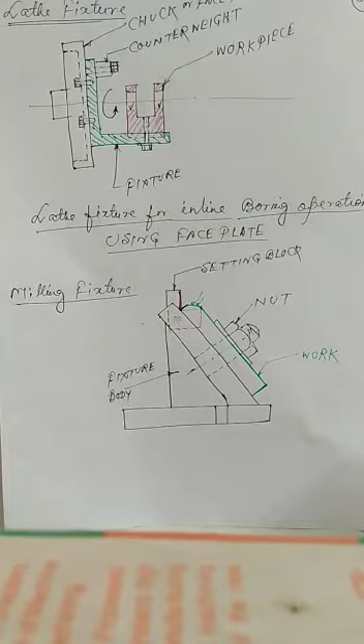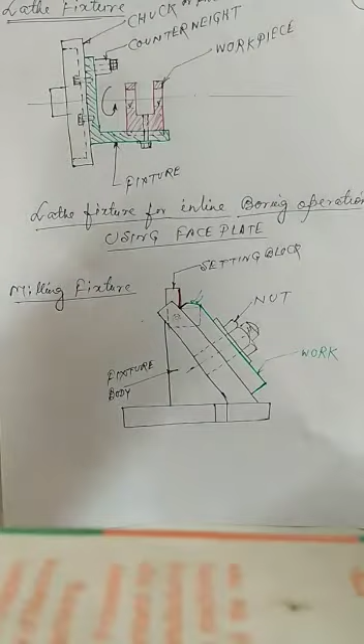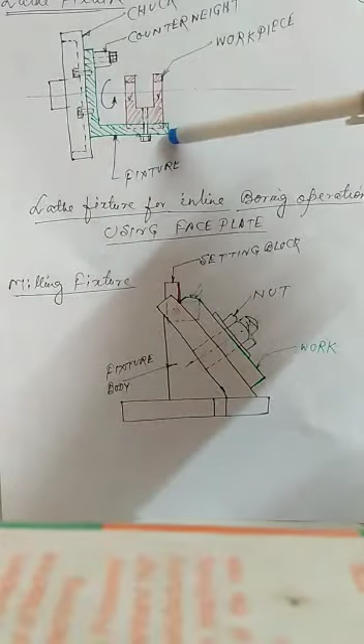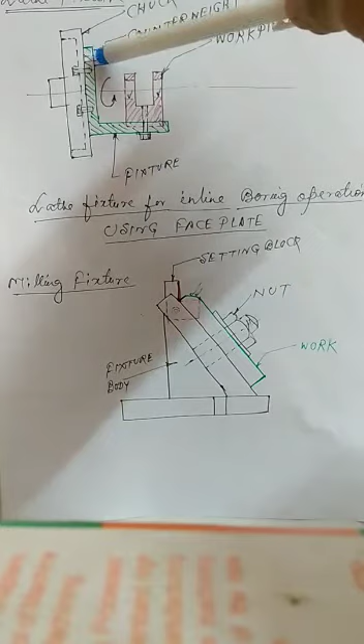First I am showing you a lathe fixture. This is a lathe machine's chuck held in the headstock, and the job is placed in the center of this chuck, this workpiece, this red portion, fixed on this fixture. This is called fixtures. This right angle portion, the green portion, is the fixture. On the fixture we are clamping this job, and the axis should be concentric with this chuck, and there is a counterweight placed to keep the balance of this fixture.

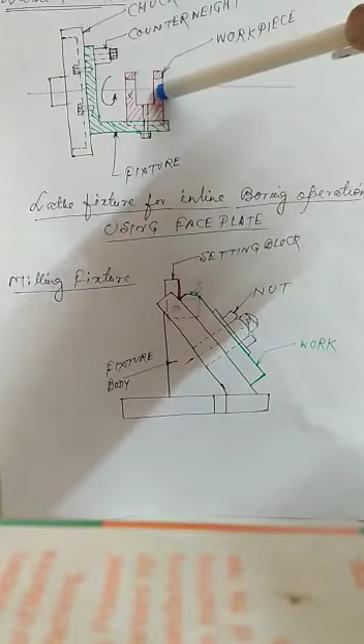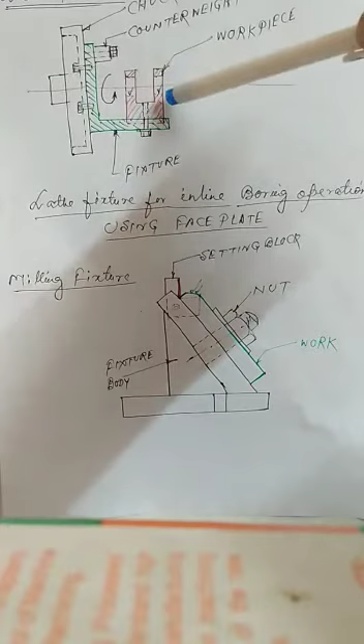So it will rotate in this fashion, and this workpiece, here in the center, there will be a boring operation in this middle portion. So whenever we are making a boring operation of a job like that, we will have to fix this job in a fixture in this fashion. So it is a practical lathe fixture for boring operation by using the faceplate.

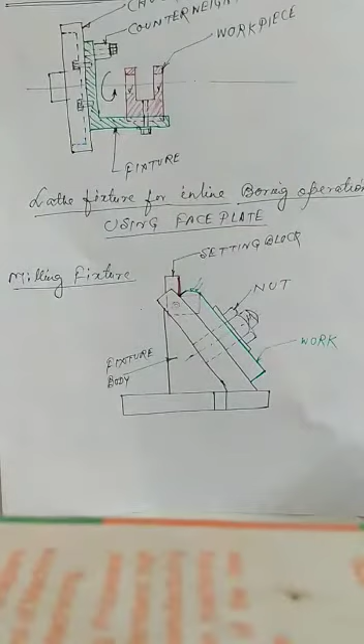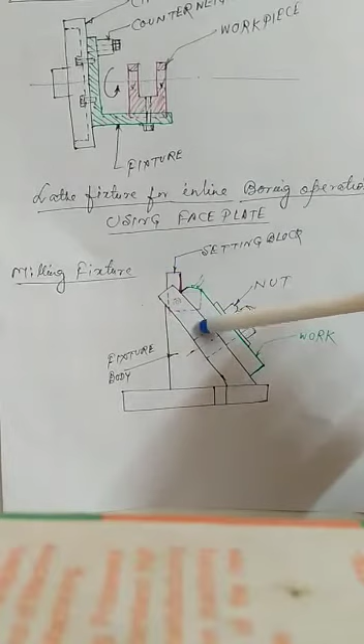Next is a milling fixture. In this milling fixture, we observe this work, this green portion, bolted by this nut, and this is a fixture body. This can be tilted at any angle. This is a milling fixture, and it is a setting block here. By tilting properly, we can set it by the set screw, and we have to make a milling operation here, this angular operation. So this is a milling fixture, a very simple milling fixture.

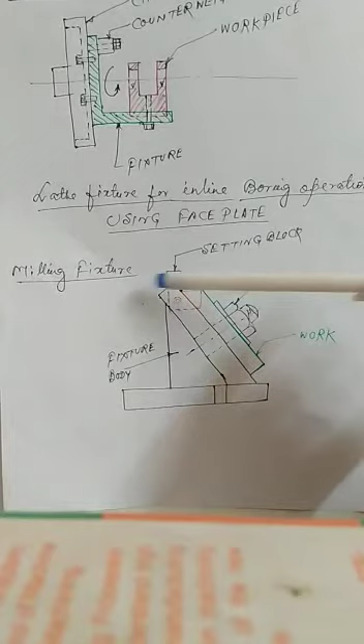Okay, there is another picture we can show you.

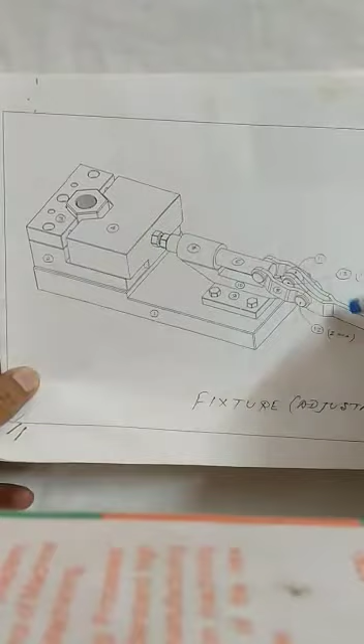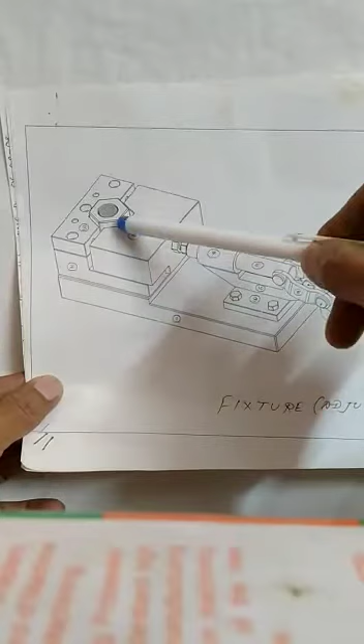This is a fixture with a clamping arrangement. This is the fixed side of this fixture, and this is the movable side. We give pressure here by this handle, on the movable side, this jaw. This is the fixed jaw and this is the movable jaw. It will be tightened on this job, and this job will have operation in the center. So this is an adjustable fixture.

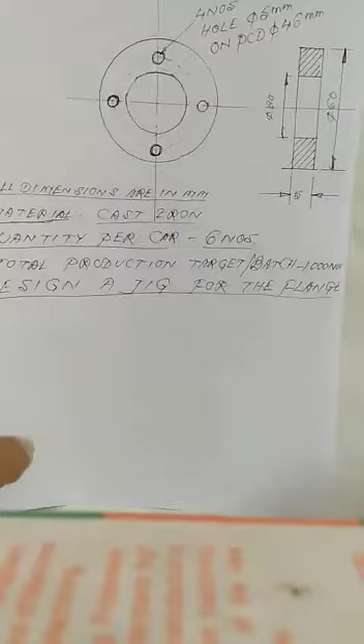Now I am coming to a practical idea which I am showing you. We have to understand in the practical field: say we have to manufacture a flange.

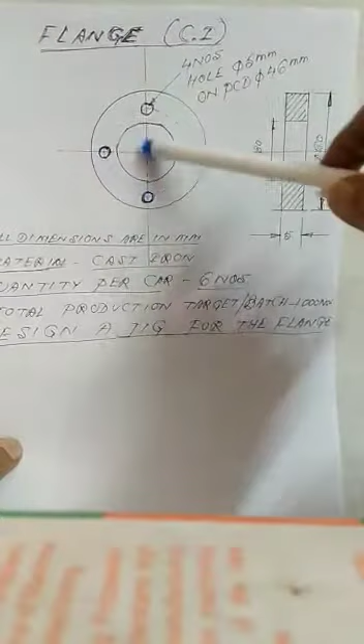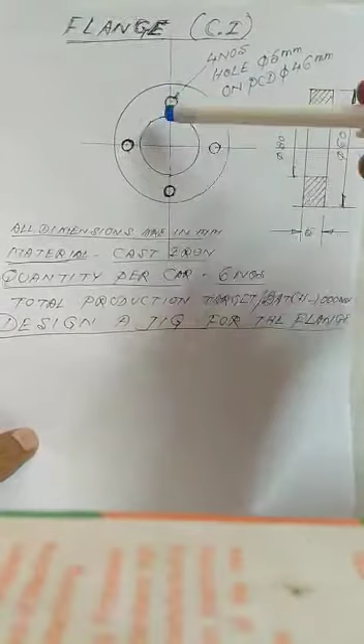There are two views: a front view of this flange, and the top view. We observe it as a circular portion whose big diameter is 60 millimeter, and there is a hole inside; in the center, this hole diameter is 30 millimeter. We have to manufacture 4 holes, 5 millimeter in size, on 46 PCD, pitch circle diameter. These are all in millimeter, and this is made of cast iron, and it is a part of a car. For each car it is required 6 numbers.

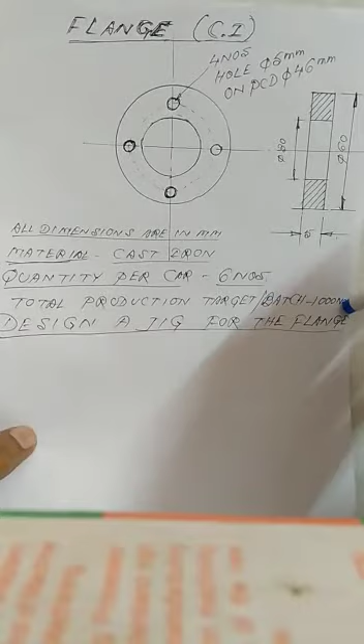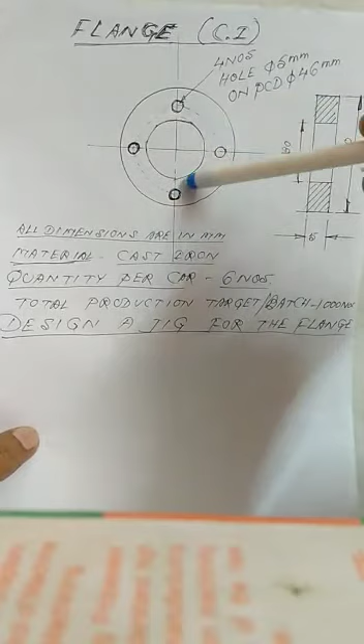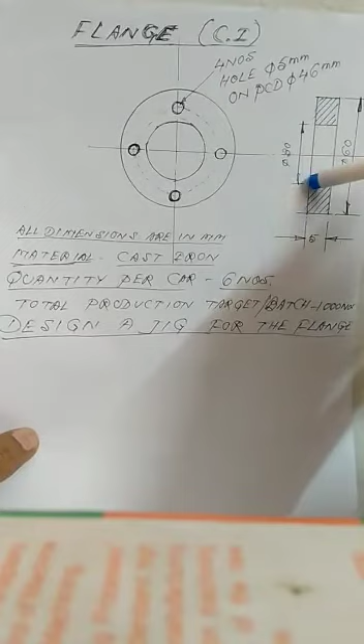So we have to manufacture, say, 1,000 pieces per batch of this flange. For this drilling operation, we have to make this drilling operation using a jig. So after making the casting of this flange, we have to do different turning operations for the 60 millimeter diameter and 30 millimeter bore. We take this job from the lathe machine by finishing these dimensions, 60 diameter and 30 millimeter bore, and after that we have to manufacture these 4 holes of 5 millimeter diameter on 46 PCD.

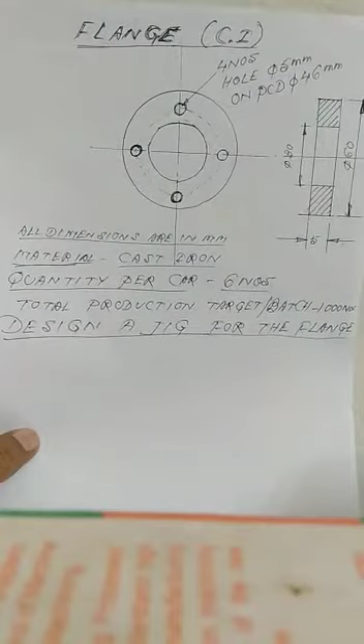So we have to manufacture a jig. It is a practical problem, how you will manufacture this. So before the invention of these jigs, what did we do?

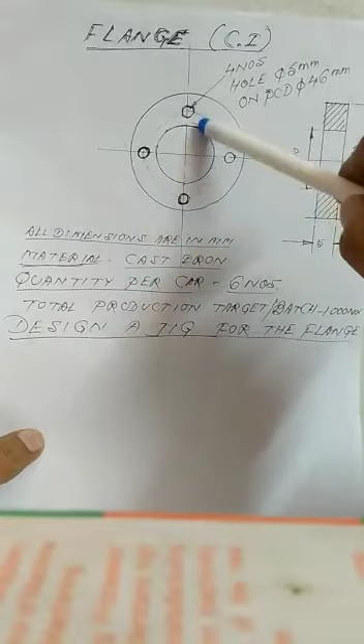We did the marking of this particular drill hole point on this flange by the chalking method, and after chalking we used marking tools and measuring tools to mark this point, which we identify by the punch. So for each job, say for 1,000 jobs, we have to do marking for 1,000 jobs. This marking operation is done by a marker in the fitting shop, so there is lesser chance of accuracy, and there is also a chance of misalignment. That is the problem.

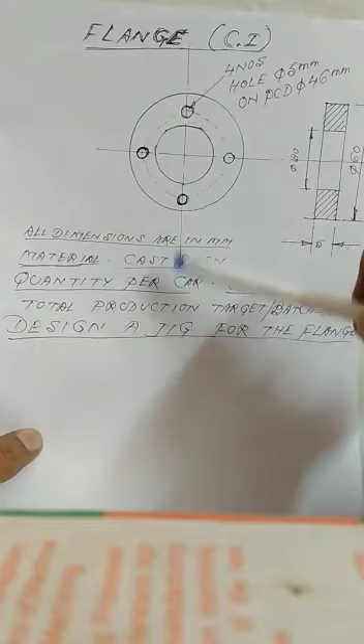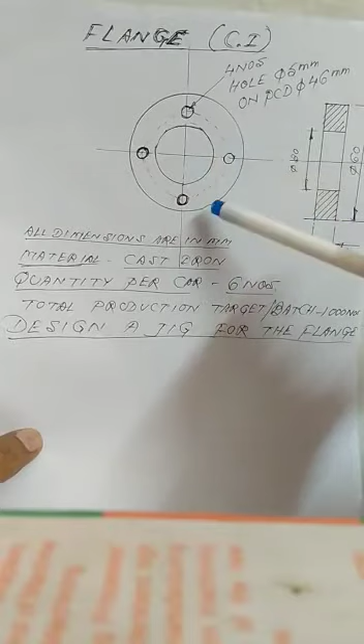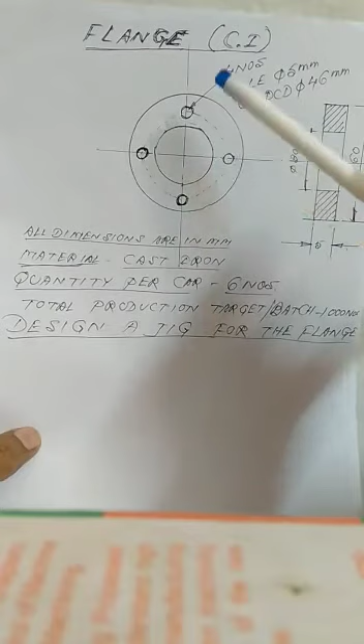And it will take more time, so the productivity will be much less. So to avoid these marking operations before the machining of these drilling operations, we have to ensure productivity with maximum accuracy and proper alignment of all the flanges. So we have to manufacture a drill jig.

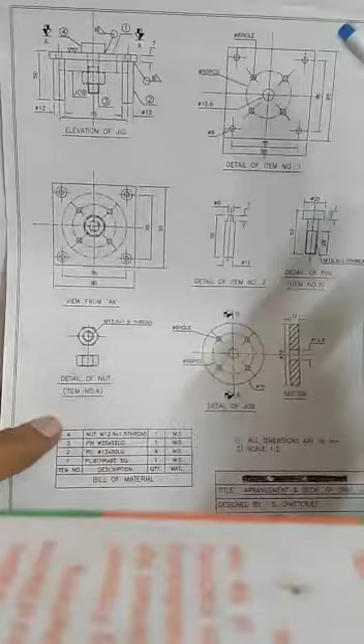So I am showing you a particular drill jig for this particular job. It is clearly showing you the total picture of this jig. Just look at this figure, this assembly figure. This is the job we have to manufacture, these 4 holes here which I have shown before.

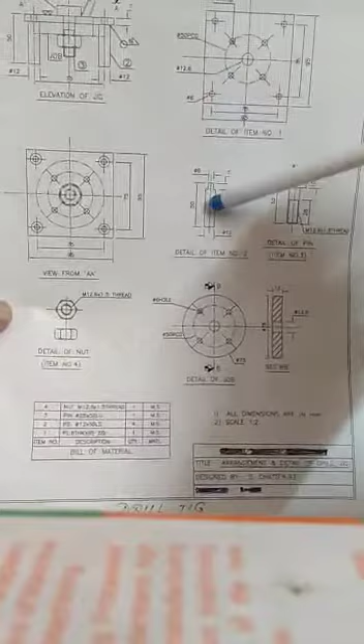In this position, first of all we have to make a jig plate here, and in the jig plate there are 4 holes in the corner. We have to make the 4 legs here. The 4 legs will be fitted here in this fashion. This is the assembly of this total jig. The 4 legs are like this.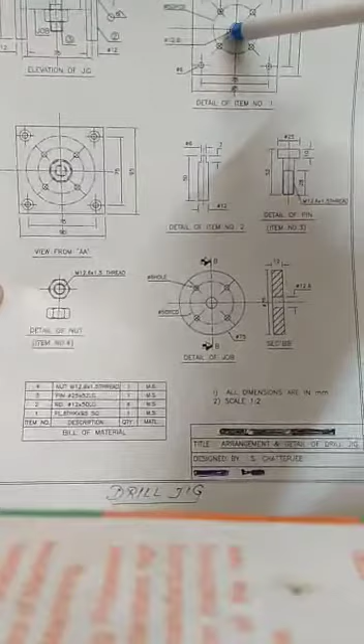These are the individual parts, and these legs are fitting here. In the center of this jig body there is a hole, and in this hole we have to manufacture a hole where we place a locator. This is a locator, this is a nut, this is a bolt. We have to locate this in the center here, in this way.

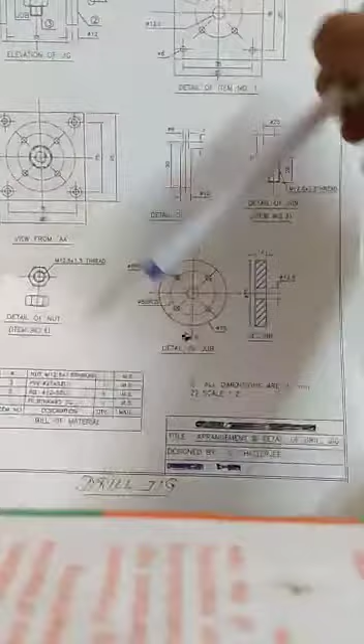The top portion is here and the lower portion is here, and there is threading here, and there is a nut here. This nut is fitted here. We have to manufacture this nut.

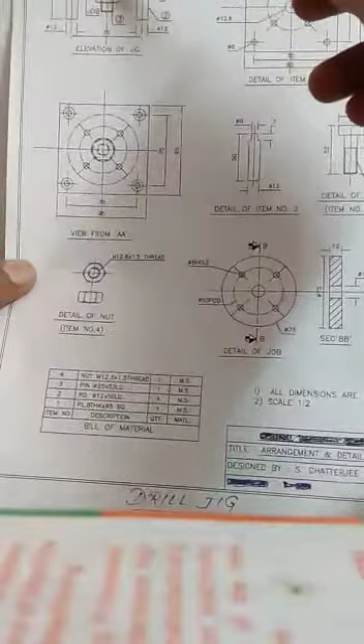So whenever we have manufactured all those things, this pin or leg will be placed here by aerolite or by welding, and also this locator or this bolt will be placed here, and we have to make a proper tightening by this welding operation. So this is called the locator, center locator.

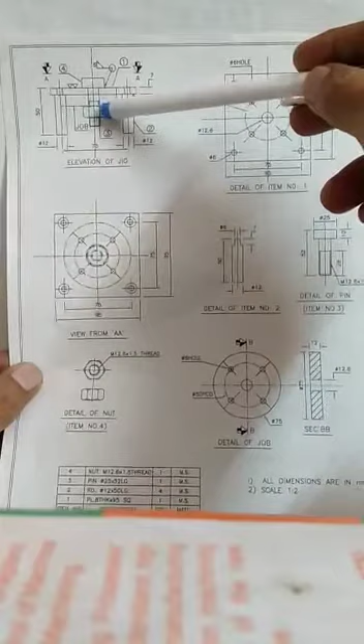So after assembling everything, we have to place this job, which we have to make the drilling operation from the lower portion. After placing the job here, we have to give the tightening with the help of this nut. So after giving the tightening, we have to manufacture the holes here.

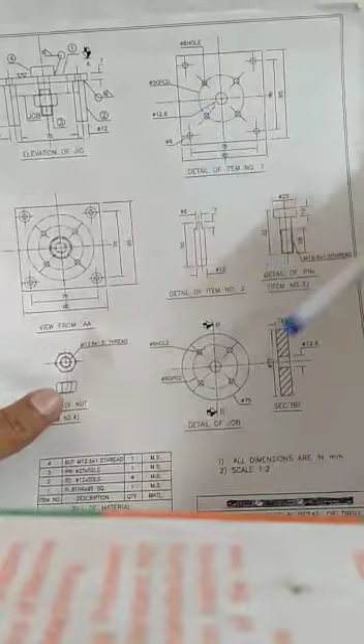We have already made the drill hole here, 4 numbers in this jig body, very carefully, in a single jig body. We have manufactured the drilling operation according to the size of the drill which I have to make. So we have to make this drill operation.

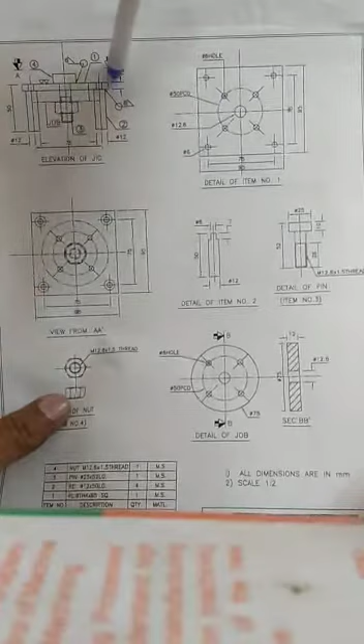So after fixing the job here, we have to operate the drilling in this position, particularly these 4 positions. We can use the drill bush, 4 number of drill bush in every place. We can place this drill bush, and by tightening and clamping here, we can use these jigs to get maximum production, or to get the 4 number of drill holes for a job.

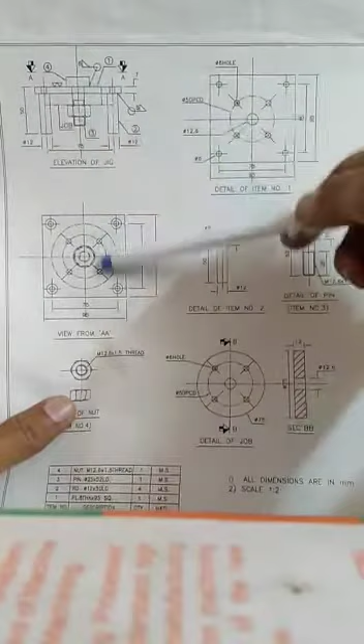And after making one job, we have to loosen this nut and remove this job again. After removing this job, we have to take one more job, and by setting the job in the previous way, we have to make the tightening of this nut.

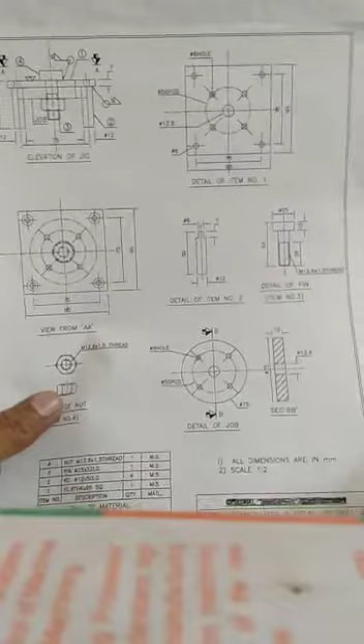So in this fashion, we can make 1,000 number of round jobs, flange, very quickly, and the productivity will be much higher, and the accuracy will be much better. So this is the detail of jigs which we have used here, and this is the bill of material which we have used here.

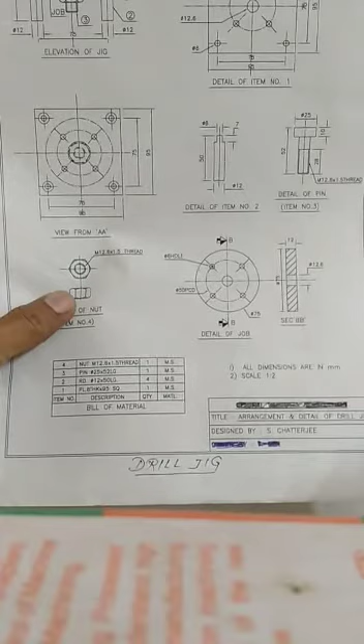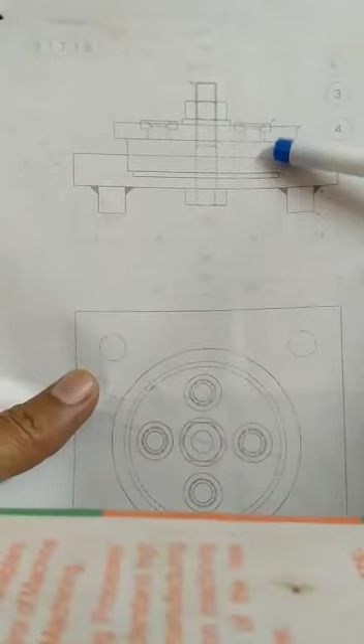And I have another design of jig. I am showing you this another design of jig here. This particular jig is located from the upper portion. This is the job, this is the jig body. We are keeping this job from the upper portion. This is the jig body, this is the jig legs, and this is the jig plate.

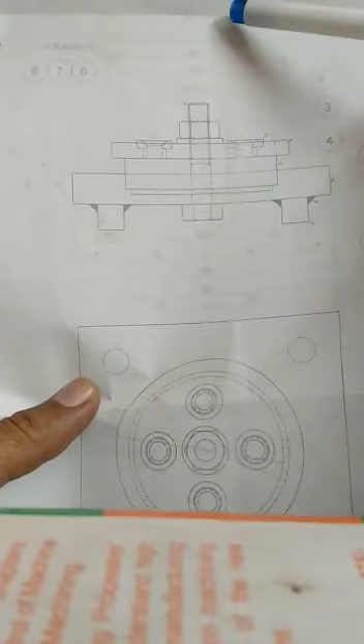We are making the hole here in this jig plate. This is a drill bush, and this locator is placed not from upward, but from downward. So this nut is fixed here.

The job is here, and there is a clearance here. So whenever the drill portion is done here, it will go through, and there is a clearance. So after that, the drill will be removed here.

So after making the 4 number of operations in this job, we have to loosen this nut, and the job will be moved out. So it is another type of jig for making the same type of job which I have discussed before. So I have discussed two number of jigs, practical jigs, for that particular flange.